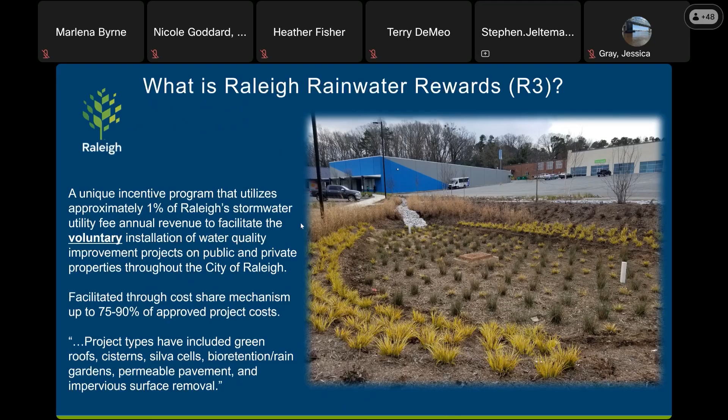The city has allocated around $3 million in investment through this cost share mechanism. As we've grown with the program, we've increased our funding, with great plans in the future to advance this even farther and grow our reach and outreach methods.

We've also recently approved a subsidy program to assist applicants who are low income, affordable housing, places of worship, or nonprofits that serve that immediate community and own that property. And even more recently, the city of Raleigh has been reaching out to third-party support for gap funding, voluntary project support, and incentives to help grow this program and its financing.

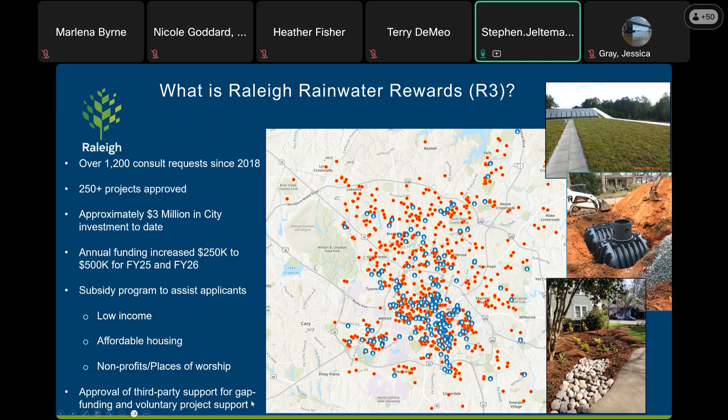So some of these program elements - at a high level, who is required or eligible and how these programs are successful. When an applicant reaches out and wants to participate, the first thing is they must be part of the city of Raleigh. We do not support projects outside the city of Raleigh using public funds, which makes sense. In conjunction with that, the property must be within city limits.

It's not an independent do-it-yourself kind of thing. You do consult with city staff. We provide guidance documents and our minimum design criteria. We support, help, and lead property owners through the steps to complete a successful project, and that consultation is a requirement we perform. We need eyes on it - even a top-end engineering firm participating in this program needs a consult with our city staff.

Part of these projects involves due diligence to make sure they succeed. One way is making sure, especially in Raleigh and the Piedmont, that water will actually infiltrate and these devices are built correctly. So we ask for basic infiltration testing when they submit their application, and I can get into more detail as we progress through different project types.

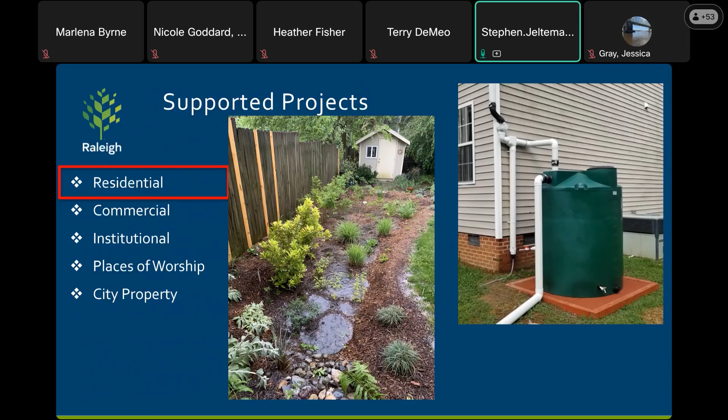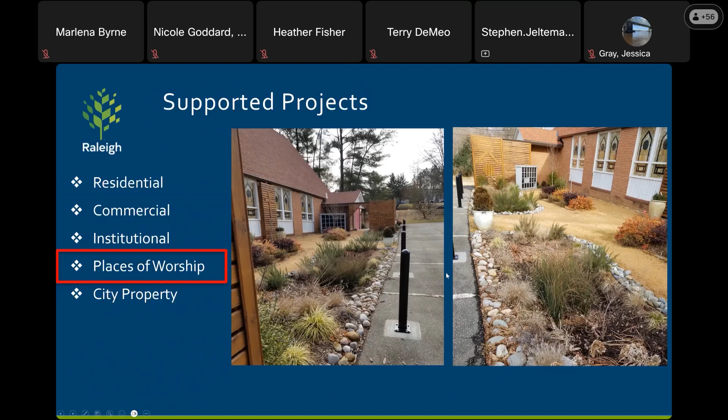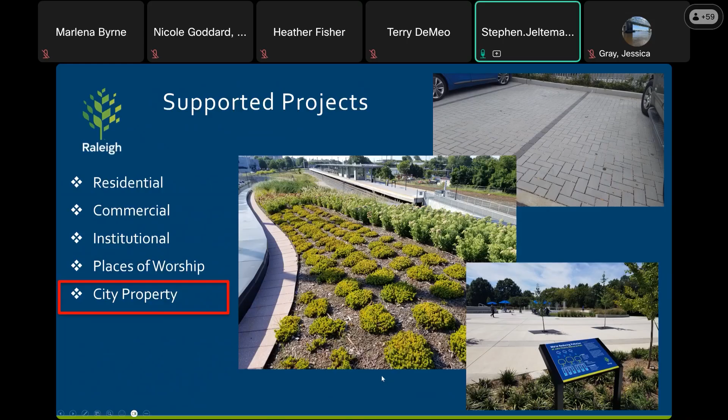Benefits to the city and community - it's a hand-in-glove example of education and outreach direct to the community. Staff, including myself and two other people, have direct conversations and relationships with over 1,200 applicants who reach out to this program. During those consultations, we're not only selling the program, but speaking about overall city goals and water quality goals as they relate to reaching their specific needs and interests, which can be quite diverse. Some people might be interested in managing a nuisance flooding issue, which is very common. Another instance is more from an ecological perspective - maybe they're more in tune with climate action and want to address water quality concerns in their community. Another really common example is just how do I add sustainable landscaping value on my property that I can manage more easily. So there's a unique range of applicants that come, and we have conversations with every single one.

Depending on my time here, I'm just going to highlight some projects and show some pictures and describe them. I think we have plenty of time, Stephen. Awesome—go ahead, please. Great, I appreciate it. All right.

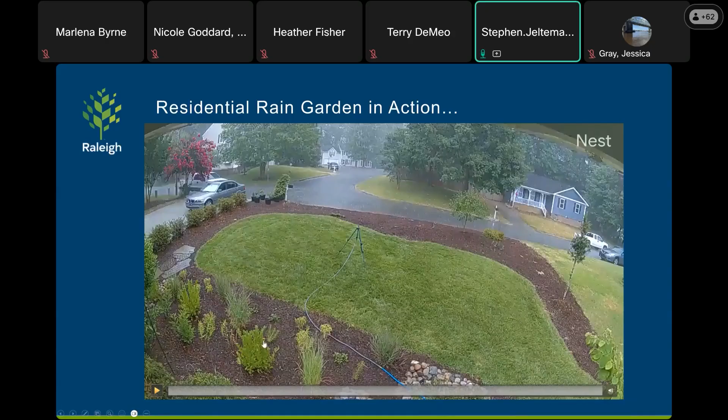So this next slide shows the typical and most common device supported through this program, a residential rain garden in action—this is just a time lapse. You can see as the rain enters into that garden on the bottom left, it fills, and within several hours it's already infiltrating into the ground. Otherwise, over the space of a year, that roughly 250 square foot rain garden would be sending approximately 40,000 gallons of water through our storm system, especially in this Piedmont where our soils don't infiltrate very quickly, putting huge loads and stress on our receiving waters.

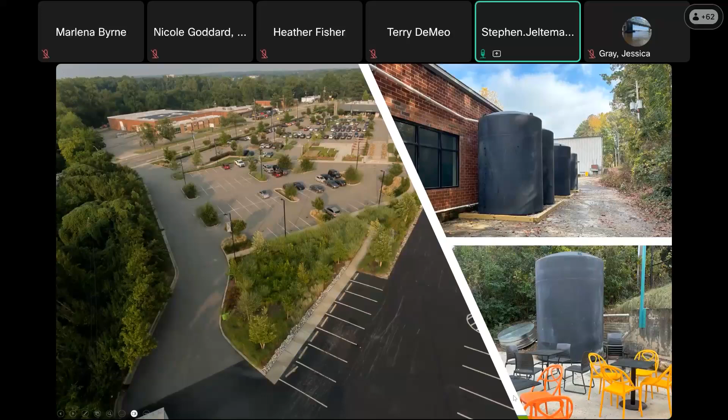Next project—this is one of our highlights I'd say, with a commercial entity and a good partnership. This is off Capital Boulevard, an old area of town with a lot of impervious surface. This property owner contracted with us, and as you can see on the left, it's got a lot of green islands of infrastructure—a large network and series of bioretention basins, where previously this was just a gigantic asphalt lot that discharged to an impaired water body within Raleigh.

They worked with us over two different events, or two different phases, to not only build large-scale bioretention basins but also small-scale islands to intake surface runoff, as well as installing a series of large cisterns on the backsides of their buildings that also take roof runoff. This has drastically reduced volume and pollutant loading in that area, especially to an impaired water body in downtown Raleigh called Pigeon House Branch.

On top of this, I'd also note that we have a series of signs and educational placards—I don't have a picture of it—so when people go to this place, to the brewery, and sit out on their patio, they get this education and outreach; it's very forward facing, the partnership we have with them. It's been fantastic. This is another example of that utility that commercial property owners can use to benefit their company—this company is a landscape company called Leaf and Limb.

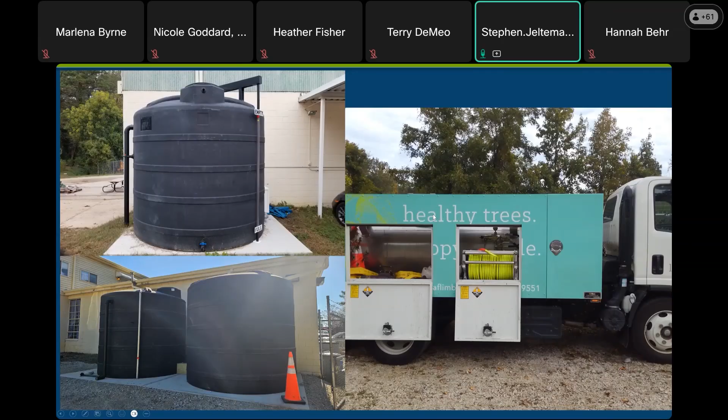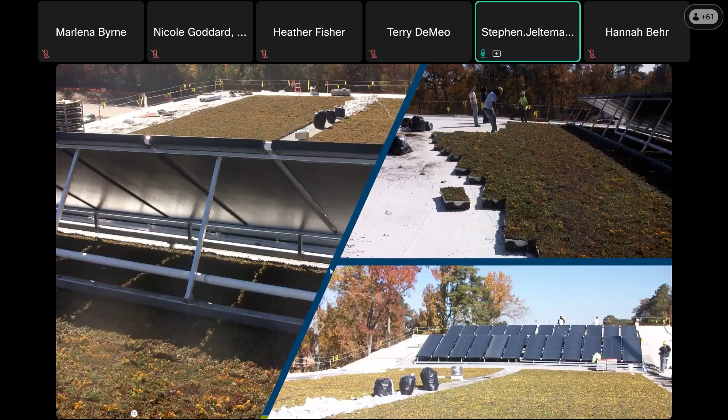Here's an example of a green roof. We don't have a lot of examples of green roofs because they require quite a bit more engineering and they're expensive. But I wanted to highlight this one as it's a city property located on top of a large aquatic center, and it has a sustainable approach, not only through solar panels, but also through that green roof concept. And it's been a success.

All right, and that brings me to the end of it. I know the questions are going to be at the end here, but please, if there's any interest, or if you do work for a municipality, please do not hesitate to call or reach out. I'm typically very receptive as best as I can, and I'd be happy to go into more detail about this program with you. So thank you so much, Stephen.

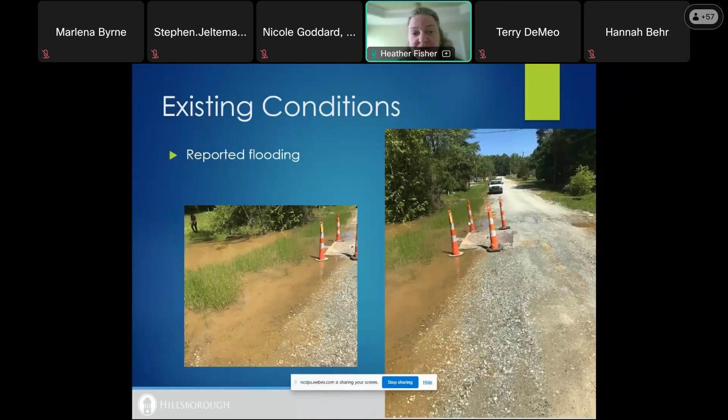They were starting to redevelop this street on the outskirts of town and called us in to look at some flooding along the road. We knew the Public Works Department was already going to be regrading the ditches and repaving as part of the redevelopment, so we thought, why don't we do something better here? Our division is passionate about green infrastructure and nature-based solutions to stormwater management, so this seemed like a perfect opportunity to implement those ideas.

I wanted to give a little more background on the street and development itself. It was on the outskirts of town, so more of a suburban rural setting, not super urban. It was developed in the 1970s as a mobile home development, and by the mid 2010s the homes were fairly run down and poorly maintained. Habitat gradually bought out those properties, found the families other places to live, and their plan was to redevelop the entire street.

Habitat was already looking at innovative solutions, so adding green infrastructure was something they were excited about.

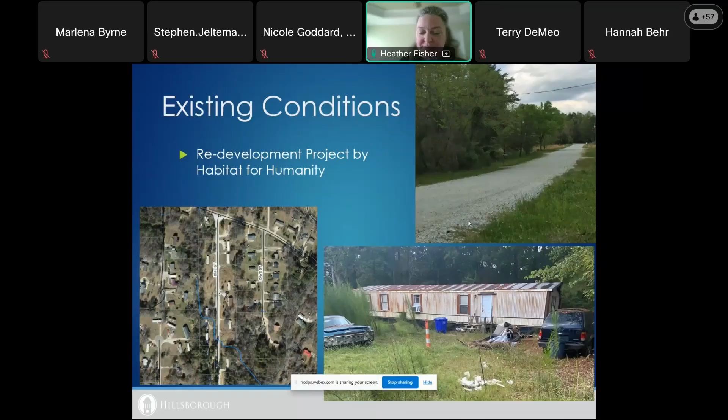From the town's perspective, in addition to working on a community project with Habitat, we were also looking for stormwater retrofit projects. We're in the Falls Lake watershed, subject to the Falls Lake rules, and the existing development rules require us to invest a certain amount of money each year on retrofit projects that reduce nutrients in our jurisdiction. This process was just getting started, and we were looking for opportunities. The idea was that we could invest money into this project, find grant money to leverage our investment, and provide benefits to our citizens here in the upper part of the watershed while complying with the Falls rules and providing benefits downstream.

The project was very focused on bioswales. Bioswales are similar to bioretention cells. They're meant to fit within the road right of way, and the idea is that they're an alternative to stormwater conveyance - an alternative to an underground pipe, to curb and gutter, to a ditch.

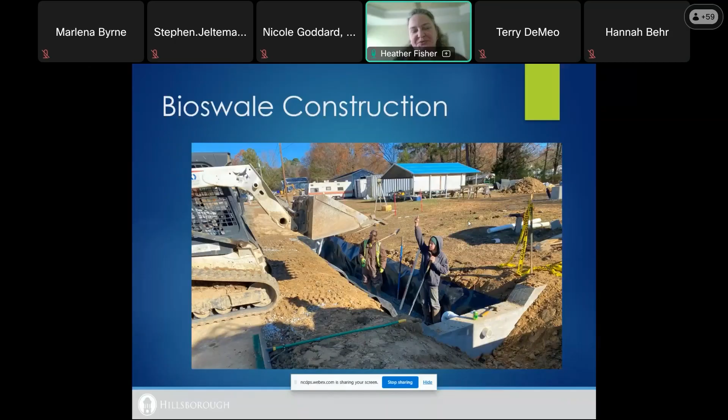To give you an idea of how much storage these devices can provide - it's storage and also conveyance - this is a picture during construction, and the trenches they have to dig are very deep because you have all these layers of the media and the underdrain. So this is the hard work the bioswale is doing underground, while all we see is the landscaped area.

So how did we get this done? We had a great team of partners, and I'll give you a sense of each one of those.

Piedmont Conservation Council led the grant seeking and grant administration, and we've worked with them in the past on projects that are nature-based. They are RC&D, a resource conservation and development organization. They work in 10 counties across the Piedmont of North Carolina, and they focus both on projects related to agriculture as well as restoration in either urban or rural areas. Stormwater and green infrastructure fit in within what they do.

Habitat was an amazing partner. Since we have a little more time, I'll just make sure everyone understands who Habitat is. I'm sure you've heard of them, but who they are and how they've evolved is very interesting. They provide adequate, affordable housing to underserved individuals and families.

The people they serve are home buyers, so in order to buy a house, they perform sweat equity. They have to provide volunteer hours in order to earn that sweat equity, and then they also are required to make home payments. So Habitat funds the home building through donations, grants, and volunteer labor.

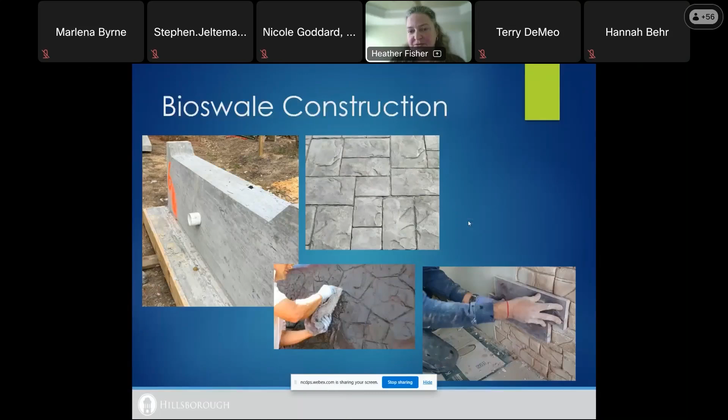One of the details that we asked for feedback on was the look of the weir walls. The weir walls are going to be holding in the soil media, and so we gained feedback from the residents on the type of look. We ended up using stamped concrete for that.

Now on to construction. Construction occurred while Habitat was still finishing some of the homes. We waited until they were at that stage because, as some of you probably know, bioswales can get easily clogged by sediment, and we needed to be able to control the sediment runoff from construction.

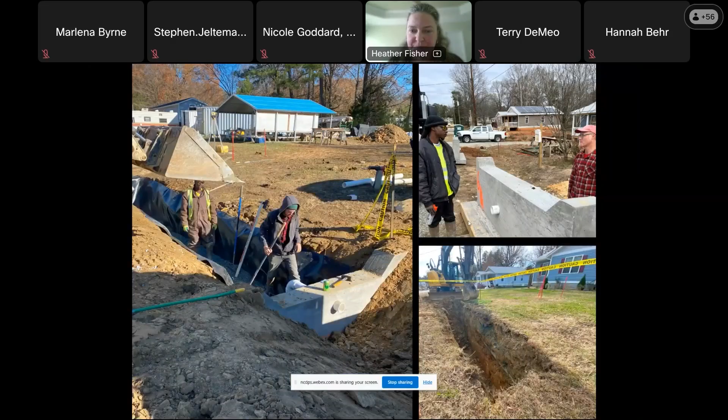This is showing one of the bioswales before the mulch was laid and the plants were planted. Hopefully you can see the gray is the specialized soil media.

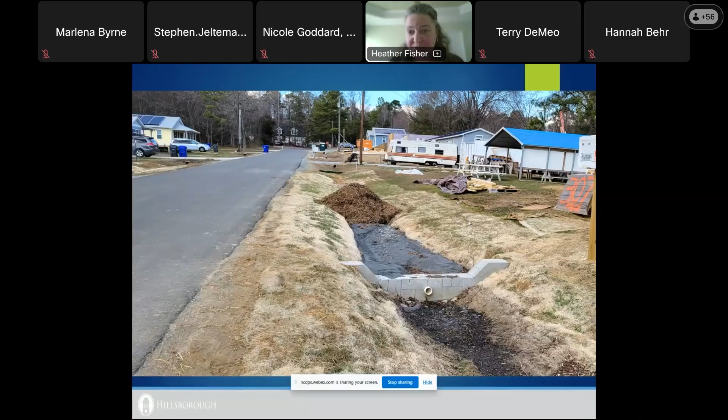As soon as we got to that stage, we started education events that were also volunteer work days. That's how we planted the bioswales and also the native plant gardens. This is one of our education consultants, Diana Montgomery.

All the bioswales were planted by volunteers. In fact, this photo shows one of the homeowners who has a bioswale in his front yard.

Another education event. Then in order to outreach to that wider audience, we held a tour and networking event. Here we were targeting professionals from affordable housing, as well as the stormwater management and environmental fields. We had a great turnout for this. It was a lot of fun.

The hope was that what we can provide in terms of lessons learned and process could make it easier for others to take on a similar project or come up with something even better.

Lastly, for the wider audience piece, we released a promotional video this fall. It tells the whole story. It's about 11 minutes long, and our hope is it can be widely shared and provide a resource. This is on YouTube, so I encourage you to check it out.

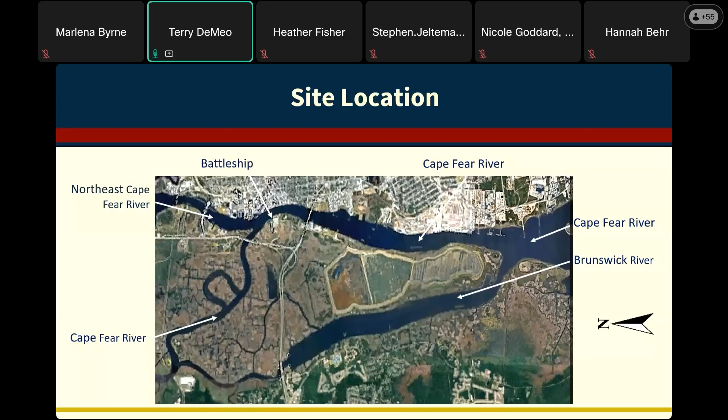The flooding is a problem because the ship is an enterprise of the state, and what that means is that by statute, the ship receives no annual state appropriations. Hold on a second, my PowerPoint presentation is getting away from me. We must pay all of our operations and maintenance by visitor receipts, gift shop sales, events, and rentals.

Tidal flooding also interrupts our operations and damages our grounds, like killing our 70-year-old live oak trees from saltwater inundation. In 2017, we asked the Army Corps of Engineers to conduct a hydrology and hydraulics review of our site.

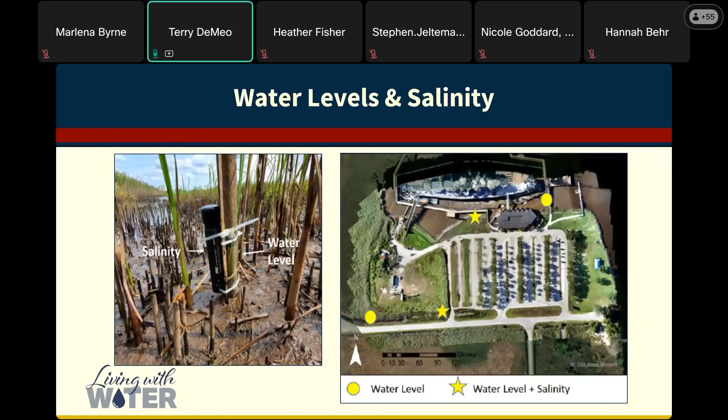So about this time in 2018, 2019, I was speaking to a lot of community groups and applying for grants for our tidal flooding issues. And I found that the flooding images didn't really grab my audiences.

So I became curious and started thinking, was our flooding really worsening? Using the tidal record at the downstream gauge and the National Weather Service's definition of a flooding event as tides that are 5.5 feet and greater, I developed a trend analysis and found that tidal flooding frequency was in fact worsening.

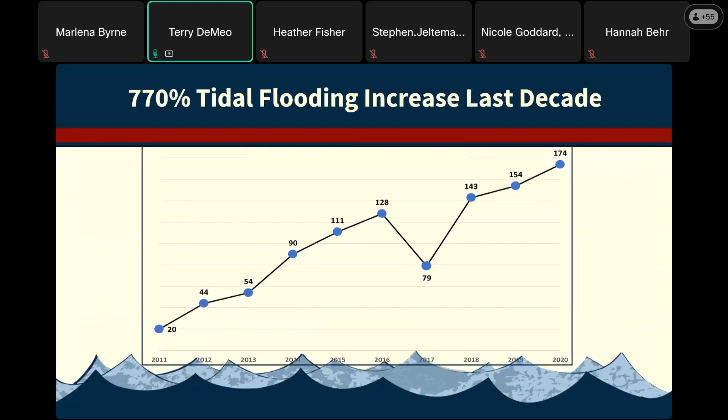So the Living with Water project was implemented through a $6 million and some change funding package. I put together a package of grants, 4 main grants.

The Department of Natural and Cultural Resources contributed some repair and renovation funding. We received a direct appropriation from the state. The Battleship Commission committed funds out of their reserves, and we also collected donations from individuals.

The Living with Water kickoff meeting was in December 2020. Construction began in February 24, along with our groundbreaking event. We had about 55 stakeholders and supporters attend the groundbreaking event, including state and local elected officials and representatives of all of our funders.

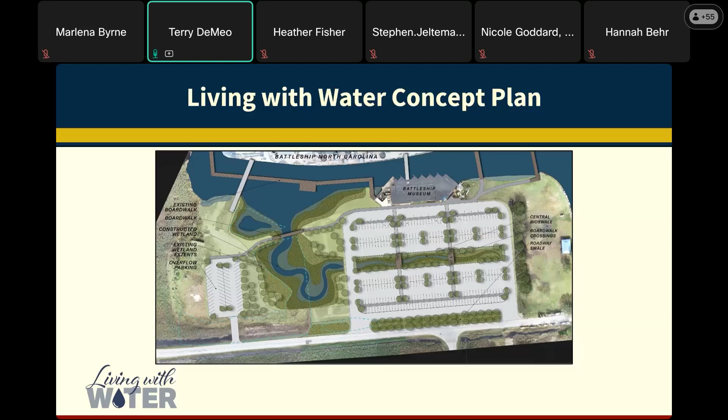So what we have done is we have restored about 800 linear feet of living shoreline, and some down here as well, and around our tidal creek. We have removed about 2 acres of impervious parking and restored that area with a wetland and tidal creek habitat.

And we're in the process of elevating the remaining parking lot area above the usual tidal flooding level, including completing the bioswale that's running down the middle of it.

Because we needed to remain open during construction, we have divided our parking lot construction into 2 phases. The first phase was the one closest to the wetland area, and that is now open and receiving parked visitors and staff vehicles. And we're now working on this piece here.

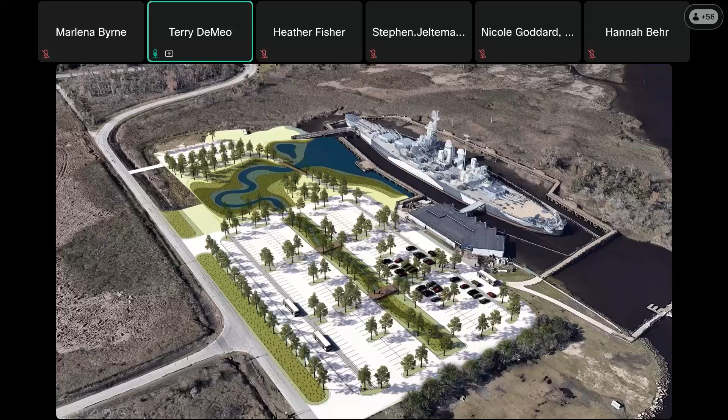So the 4th project element is our multi-year project monitoring with UNCW and NOAA NCOS. This is contributing to an academic and agency knowledge base of the resiliency benefits of green infrastructure and nature-based solutions.

As well, we have project photos that are taken twice a month, and that's creating a visual public record to accompany the monitoring. And then the 5th element of Living with Water is education and outreach. This includes our interactive GIS-based story map, which is accessible on our website.

Living with Water was also featured on an episode of the Waterloop podcast. So that's been out there on the podcast airways.

For the 5th year, we're hosting the junior and senior high coastal physics and engineering students from the Cape Fear Academy. We're doing that tomorrow.

And then we're also in the early stages of creating a living laboratory at the Battleship site in collaboration with UNCW and the North Carolina Sea Grant to support rigorous scientific research and provide opportunities for place-based learning beyond the Living with Water project. So this living laboratory is intended to grow and maintain in place and grow over time into the future.

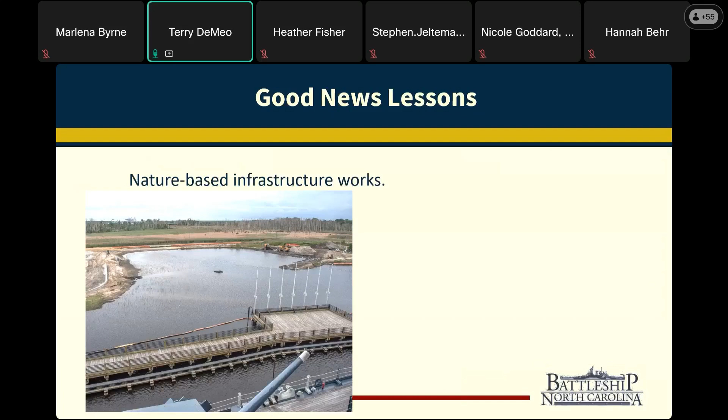Some of the good news lessons: animals love green infrastructure. Within days, fish and birds began using the living shoreline and wetland habitats. Tidal floods are held by the wetland and flooding impacts have been reduced. Our monitoring photography program has created a rich project legacy. And finally, Living with Water has enjoyed fantastic media coverage and project interest. So nature-based solutions really offer hope.

Some of our not-so-good lessons: our permitting process seemed really long and contentious. We found regulators didn't seem as comfortable permitting nature-based green infrastructure as they did permitting bulkheads and docks here on the coast. Construction was not permitted in the living shoreline or wetland areas during the moratorium, April 1 to September 30, to protect juvenile fisheries. We did receive moratorium relief in late August and were able to plant marsh plants in early September, but this was followed by a really rough autumn of heavy rains and many king tide events.

So our marsh plants look a little rough these days. Our permit requires 90% survivability and replacement of our marsh plants for the next 3 years, which I understand to be a very high percent of survivability for recently installed native plants.

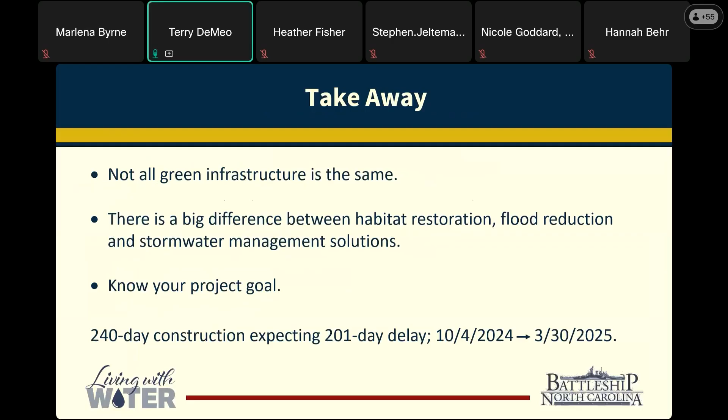So I had one other set of takeaways, let me try to get through this.

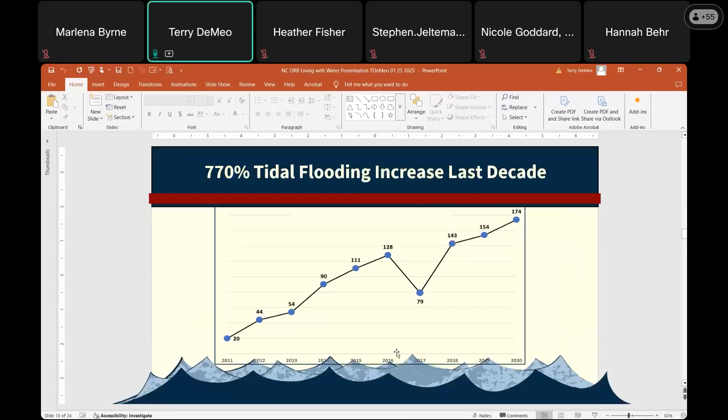Not all green infrastructure is the same. There's a really big difference we've found between habitat restoration and flood reduction and stormwater management solutions. So I would encourage other areas, local governments, and communities to be sure you're on the same page with your design and engineering firm regarding your project needs and goals.

To circle back, NOAA's early field investigations back in 2018 discovered that tides, not rain, were causing our flooding issues, but we've ended up spending more time and money constructing stormwater solutions than our nature-based and tidal flooding infrastructure.

So thank you so much for the opportunity.